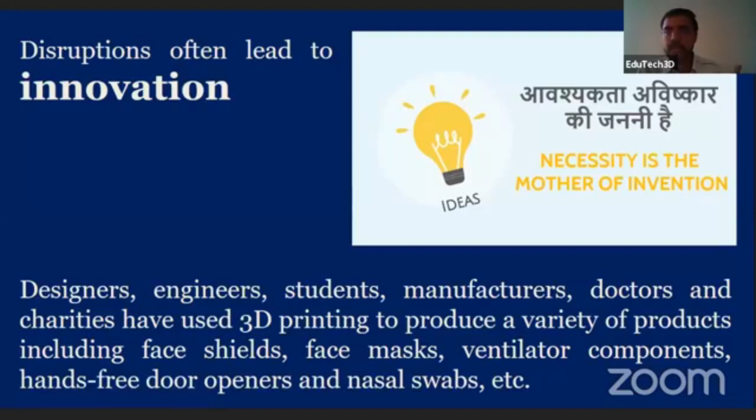For example, 3D printed face shields, 3D printed face masks, ventilator splitters, hands-free door openers, which is also a kind of innovation, and 3D printed nasal swabs for various COVID-19 testings across the world. All these things have been produced by 3D printing across the world by individual designers, engineers, students, manufacturers, doctors, and various charities who have donated these 3D printed objects to the end users, to needy people across the world, and to the medical fraternity.

After making this 3D CAD files, we need to convert into a kind of file that is known as 3D printable file, particularly .stl format. But the problem is that our 3D printer doesn't understand what data is there in .stl file. So for that, we need to convert that .stl file into a machine readable format, which is known as G-code file, what we are conventionally using in CNC machining and all that.

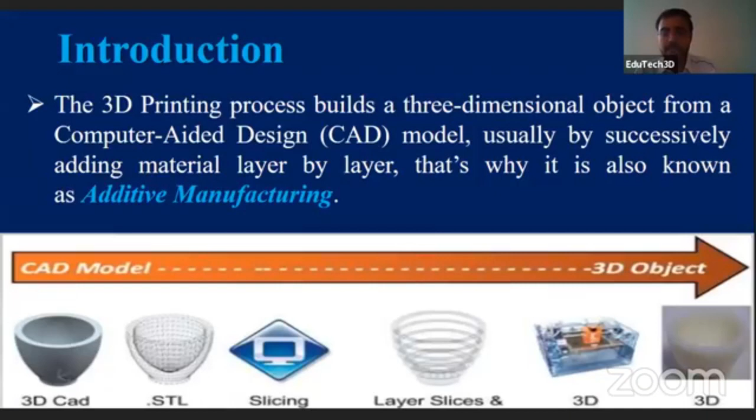With respect to a kind of software known as slicing software, we are converting the .stl file into the G-code. The G-code file contains layer-wise machining parameters in X, Y, and Z directions. It can be understood by the 3D printers. After that, that file is put into the 3D printer and machining starts, and after machining, we get a 3D physical object.

Let us understand the ecosystem of 3D printing. The 3D printing ecosystem generally contains four major aspects, starting from the hardware of 3D printing.

In the current scenario, we have so many kinds of 3D printing processes, starting from fused deposition modeling, stereolithography, binder jetting, material jetting, direct metal laser sintering, laser metal deposition, and laminated object manufacturing. These 7 processes have been categorized by ASTM and established by ISO as well. So these different processes contain different kinds of hardware according to their particular material requirements.

Going further onto the software part, to run any kind of hardware we need to have a certain kind of software. As we discussed earlier, slicing software is needed for various kinds of programming of hardware. We need the software portion of 3D printing, and this also plays a major role in the 3D printing ecosystem.

Next comes the material portion. Without that, any kind of 3D printing cannot survive. Currently we have more than 100 types of different materials, starting from plastic polymers, thermoplastics, to resins, to metals and alloys of various grades, and they are compatible with so many different 3D printing processes.

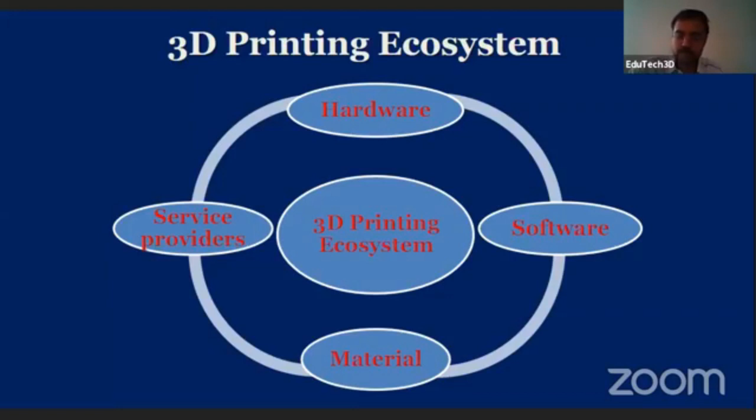If we see the situation according to the current COVID-19 pandemic, we can see innovation in all four of this type of ecosystem. Let us discuss the adoption of 3D printing across the world in the COVID-19 pandemic and what the 3D printing fraternity across the world has done to combat this pandemic.

Starting from the National Institutes of Health, a US-based firm, they have started the 3D Print Exchange, a place from where makers or individuals can get certified files of any kind of 3D printable objects. Because this is an open community, anyone can make their own models. But it is not feasible to make every model in large portions because they can contain harmfulness, either in manufacturing or in COVID-19 growth. So it is partnered with the US Food and Drug Administration, the FDA, to assist with validating designs uploaded by the community.

And so far, 18 3D printable products have been approved for clinical use. Yes, this is not FDA approval, but it is approved for clinical use, and we can use this file for mass production and for the 3D printed community.

You might have heard about this innovation which happened in Italy two months ago. What happened there is that the Brescia province of Italy was having coronavirus patients, more than 250 in number, who required ventilators because they were contaminated with the COVID-19 virus and were not able to breathe on their own. At the same time, due to the lockdown situation and due to over-orders, the original equipment manufacturer of the ventilator Venturi valves was not able to cope up with the demand.

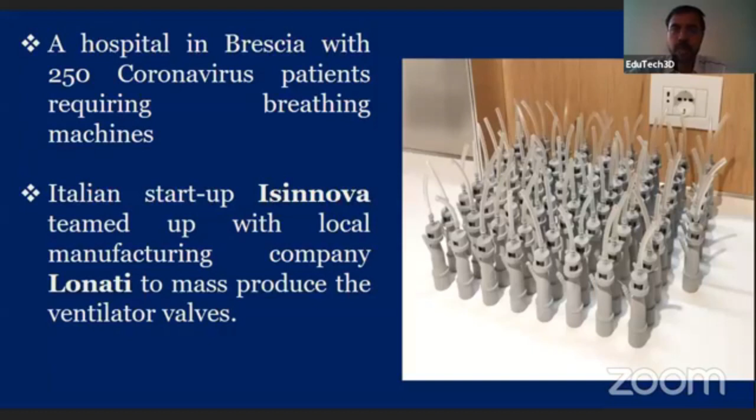They have collaborated with Lonati, and within 24 hours, they were able to produce more than 100 ventilator valves. Again, this is the second time Isinnova has come to rescue humans against the coronavirus, and they have done a novel work in terms of snorkel masks as non-invasive respirators.

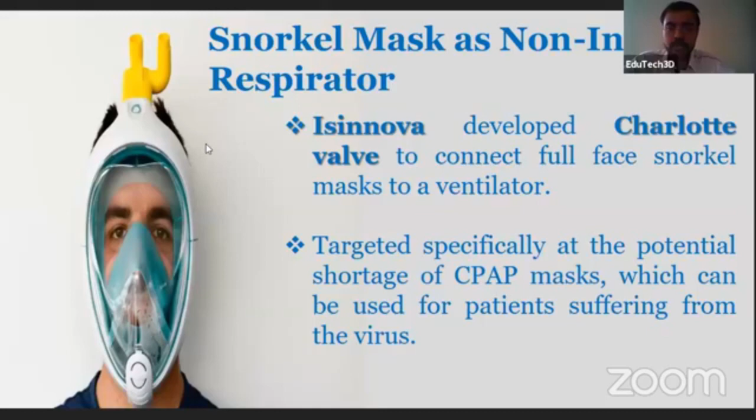You might have seen this figure in our webinar brochure also. This figure is about the snorkel mask and the innovation Isinnova had done to rescue people from COVID-19. You can see a yellow colored valve over the head of this guy, known as the Charlotte valve, which is used to connect the coronavirus patient to the CPAP respirator. It is a kind of respirator used as a non-invasive ventilation system. They have produced this valve and attached the human to the CPAP mask without any invasive process.

Let's have a look at various different companies, those who have collaborated and those who have provided their facility in the COVID-19 pandemic. Automotive giant Volkswagen has more than 125 industrial grade 3D printers in their industry. They have collaborated with more than 25 other companies and started manufacturing medical equipment, for example personal protective equipment for the medical fraternity, which they have delivered to local needy people.

Another automotive company, Skoda, has developed a 3D printing process to produce reusable FFP3 respirators. This is a kind of respirator mask which is costlier than a normal surgical mask and which is not available in abundant amounts across the world. So Skoda researched and found a method to 3D print FFP3 respirators. It is reusable, meaning we can reuse that FFP3 respirator with a kind of sanitization process - it is decontaminated and the doctor can use it again.

Tech giant company HP is employing its 3D printing expertise by turning their R&D and manufacturing centers locally in Spain and the US, making urgent, important personal protective equipment which they have delivered to needy hospitals and doctors.

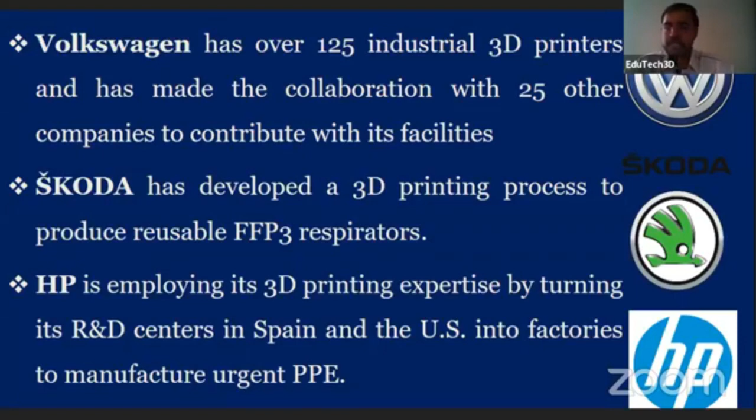Some researchers, medical personnel and academicians have collaborated together to make nasal swabs, through a community known as Printed Swabs. They have started the campaign printedswabs.org to supply millions of COVID-19 test swabs. This is a state-of-the-art process of 3D printing known as stereolithography or direct digital light processing, by which they have made these nasal swabs - a kind of testing apparatus for testing COVID-affected patients.

It was needed in abundant amounts across the world, and conventional manufacturers could not cope with that requirement. So the 3D printing fraternity found a way to cope with the situation and designed a process to 3D print these swabs.

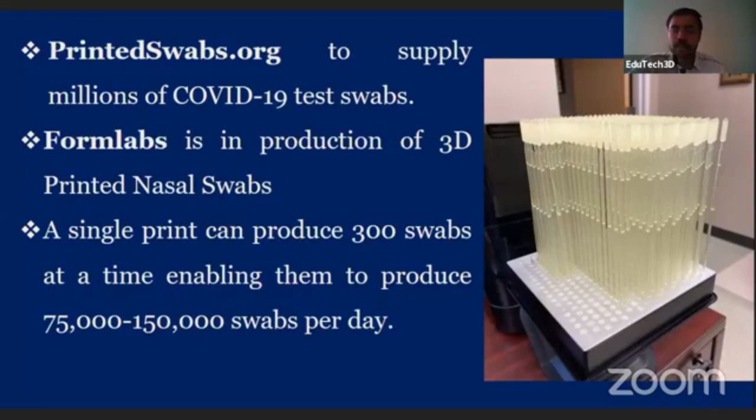Formlabs, a well-known company in the field of 3D printing, is also producing printed nasal swabs, and a single Formlabs printer can produce more than 300 swabs at a time, enabling them to produce 75,000 to 150,000 swabs per day, which they distribute across the world.

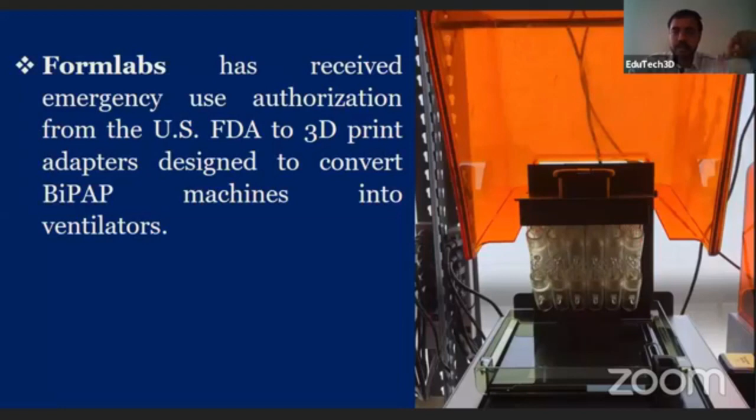Formlabs has received emergency use authorization from the US Food and Drug Administration to 3D print adapters designed to convert BiPAP valves. Earlier we saw Isinnova cope with CPAP valves instead of ventilators; here Formlabs have done a great job by incorporating BiPAP valves in place of ventilators for COVID-19 affected patients. They made a T-shaped geometry, and with the help of that valve, they are able to connect the patient to the BiPAP machine.

Another 3D printing giant company, Materialise, has released files for a 3D printed door opener. This state-of-the-art object is one of the most popular 3D printed objects, having been downloaded over 50,000 times from the Materialise website. It is aimed at reducing the spread of coronavirus, since so many people are in contact with doors and door handles, so they should not get contaminated by touching the knob of the door.

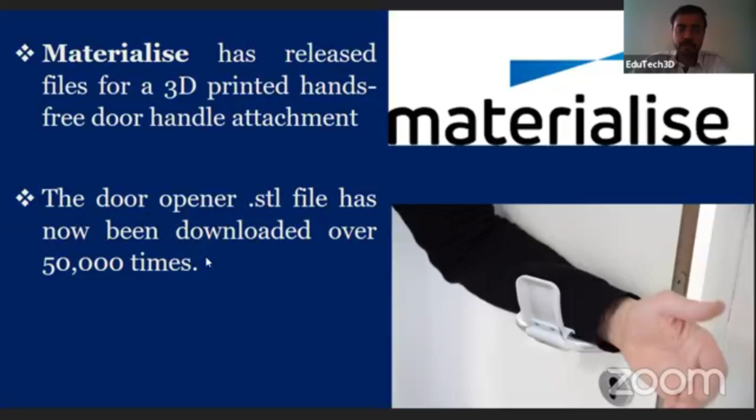Indian 3D manufacturing company Wipro 3D has innovated a design of no-contact door opener, which has multi-purpose uses. For example, if we have different kinds of door handles, we can attach this door opener and open or close the door, or switch on or switch off various apparatus using this button pusher.

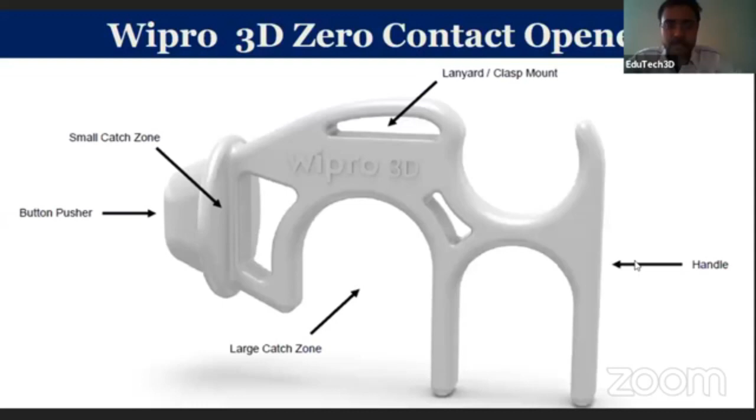So this is an innovative kind of design prepared by Wipro 3D engineers and designers. Next comes the mass production.

At the world level, there are so many companies who have dedicated their entire 3D printing farms to the development of personal protective equipment for healthcare and medical care systems. For example, a Barcelona-based company, BCN3D, as you can see in this first figure, has dedicated their entire farm for the production of 3D printed face shields and goggles.

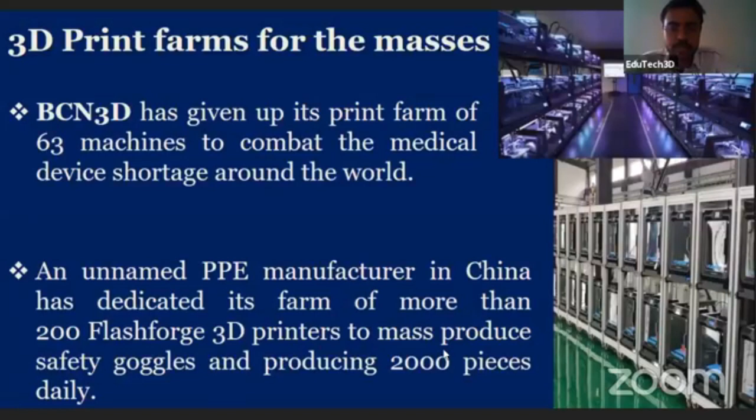Again, an unnamed manufacturer in China has dedicated its farm of 200 FlashForge 3D printers for the production of goggles, and they are producing more than 2,000 goggles a day, delivering them to needy people across China and the world.

This is another innovative project done in China during the pandemic, in Wuhan. Winsun 3D is the leading company in China in the field of 3D printing, and they are in the construction sector. What they did was produce a cubicle-like, entire 3D printed room, and they dispatched 15 different 3D printed quarantine rooms to hospitals in need in the Hubei province of China.

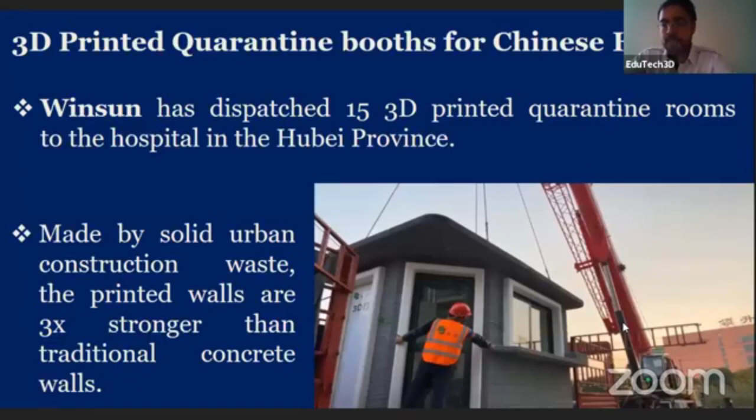They made these innovative rooms using solid urban construction waste, and they claim that these 3D printed walls are three times stronger than traditional concrete structures. These rooms are movable, meaning you can make them at one place and dispatch them to the required area. So it's not like you need to travel the entire bigger 3D printer everywhere, as you can see in the figure. You can make this at a certain place and then deliver it to another place.

They tested it for in vitro bacterial formation. They categorized the plastic surface of this 3D printed mask and found that they could inhibit bacterial growth on it, because this kind of material, for example PLA, is prone to bacterial ingrowth. That was a kind of disadvantage with the 3D printing apparatus, but they tested it over some time, for 3 days, 72 hours, and found there was bacterial growth on it. However, after a sanitization process, they removed all the bacterial growth that had formed on the 3D printed face mask. So they successfully tested it against bacterial properties as well.

Till now we have discussed the world 3D printing fraternity. Now let us discuss what our Indian 3D printing fraternity did to combat COVID-19.

The 3D printing fraternity in India has distributed nearly 8 to 10 lakh face shields overall, from which alone the Maker's Asylum in Mumbai has created something like 5 lakh face shields, and they have targeted to distribute 1 million face shields across the nation.

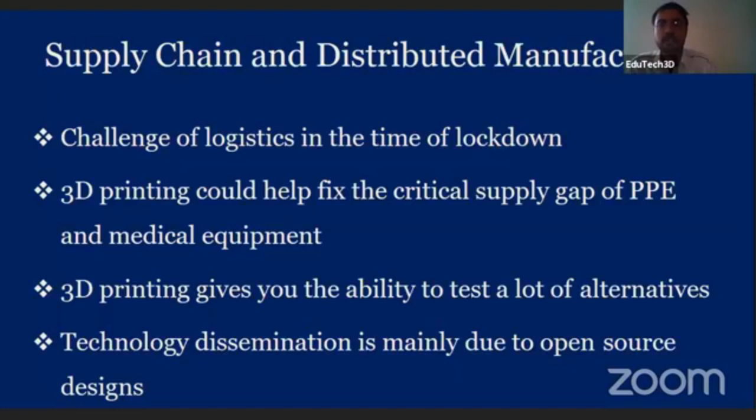And this is being started. Wipro and IISc Bangalore have made the first indigenous DMLS, the direct metal laser sintering machine, and they are now testing it. After getting verification, they will be able to produce it in mass production. So the full potential of 3D printing is yet to be seen in India, according to me.

Yes, there are also some academic institutions combating COVID-19. Stratasys has sponsored an 8-week hackathon to develop rapidly deployable mechanical ventilator systems, running from the beginning of March to the beginning of May. After that, Stanford University did a similar kind of job as Isinnova, modifying a full face snorkeling mask to use in emergency situations, which can be used in BiPAP mode rather than ventilation.

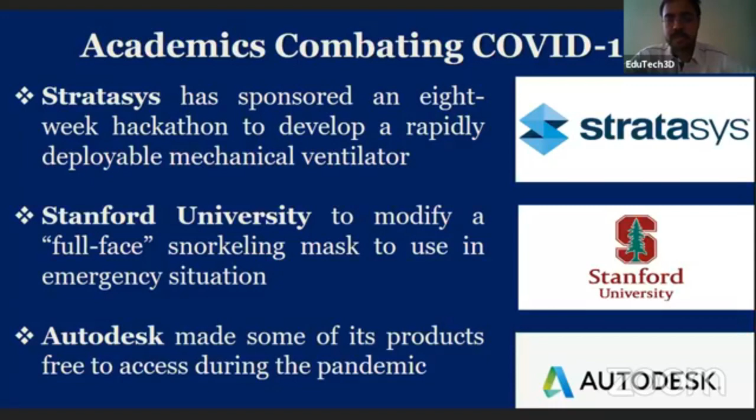It is a non-invasive procedure to give artificial breathing to the COVID-19 affected patient. US tech giant Autodesk has made some of its products free to access during this pandemic, so you can also take benefit of that - it's easily available for some period. For many of us, 3D printing has brought opportunity.

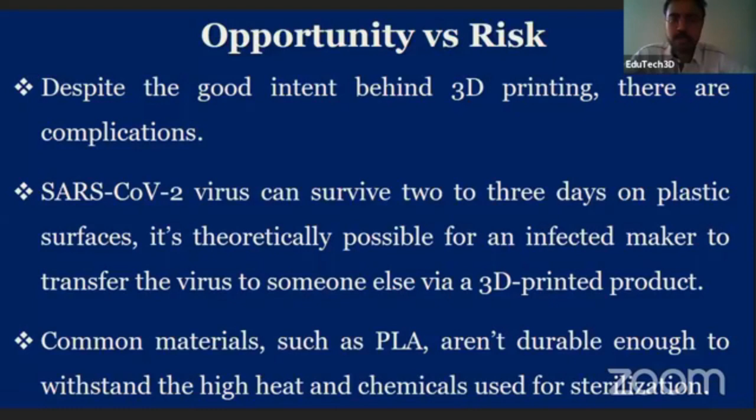There are also some kind of risk factors associated with 3D printing. Despite the good intent behind it, there are complications too. For example, this virus can survive on a plastic 3D printed object for 2 to 3 days. Hence, it is theoretically possible for an infected maker to transfer this virus to someone else who uses the 3D printed object. Some common materials like PLA aren't durable enough to withstand the high heat and chemicals used for sterilization. This can be a hindering process because there are so many advantages of using 3D printing for medical and healthcare, but there are also some risk factors associated with it, so some doctors are not going to use this.

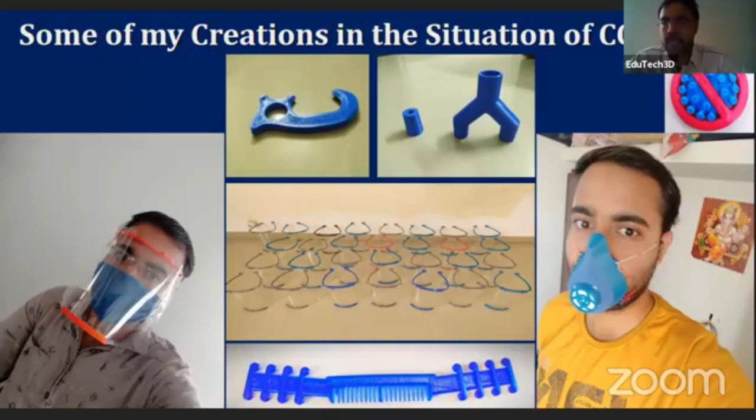This is what I do to do my bit to combat COVID-19. I am printing 3D printed face shields on my own 3D printer and giving them to the local medical body here in Kutch as per their requirement. I have been printing 3D printed ventilator splitters as well, and ear visors also. I have demonstrated all these things to the local body here, and they liked the approach. They liked the 3D printing because they weren't aware of these things before. Due to this COVID-19 pandemic, they were able to understand what the technology is, and now they will adapt this technology in many ways.

So this is what I did as my bit to combat COVID-19. You all can do your bit by any means, using your expertise with this kind of technology, and help combat this COVID-19 situation. Hope we'll be able to get through this pandemic very soon.